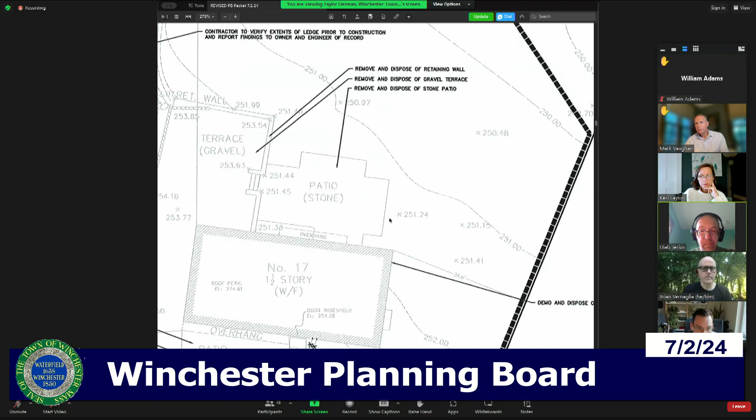So all of the setbacks conform. Yes, I'd still like to see them though. I'm surprised you can't see them on the plan. They're right on there, aren't they? So that's for the existing structure. That's for the existing structure. I thought that's the new structure, and I couldn't find any measurements to tell me anything about what the setbacks were. I thought the table had existing and proposed.

Page 24 of the packet has a diagram of the proposed house, and you can see the setbacks drawn on the map. Page 24 of the packet, at least in my packet. Are they different? Because what Taylor just scrolled by didn't have that column. Wait, maybe right in there. Since we have the petitioners, can we ask them to clarify which page has it? Sure, please. I may have just missed it.

I'm sorry. William here, representing the architects. It is the upper page, on screen now; if you were to zoom in, there would be dimensions from the lot line. And then there are tables on the page left that would give the required. Okay, I missed that. Thank you. Right there, you'll see front setback and you'll see required and then existing and proposed. Okay, thank you. My mistake. You are welcome. No worries.

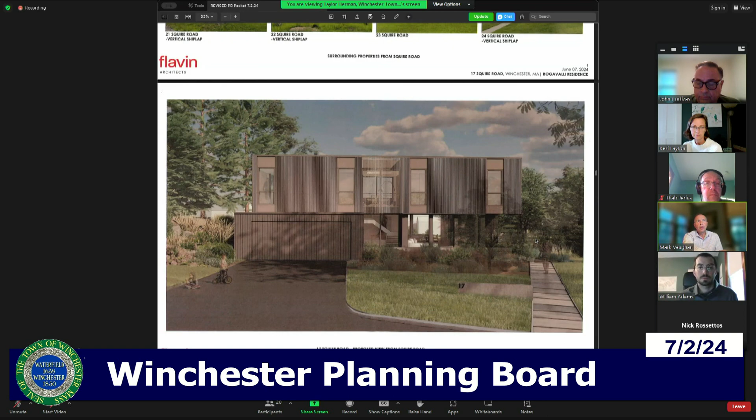And if I could speak to the setbacks, we're basically keeping the setbacks very much consistent with the setbacks of the existing home that is on the lot today. If you look at that table again, the front setback existing is 42 feet. We're at 42 feet, 42.1 versus 42.3. The side setback is 23.5 feet. We're going to be at 21.1, and the rear setback is reduced, but still well in excess of what's required. 20 feet is required. There's 105 feet today, and 69 proposed.

So I don't think by any measure are we looking to build out too much house for the lot. I mean, the lot is 22,000 square feet, well in excess of what the minimum lot area requires. So I think that the house sits very nicely on the lot. My personal viewpoint in terms of its overall size and proportionality.

And I did appreciate that this is not 7,000 square feet, or we're not discussing if we can max it out. I mean, it's a low house also. Right. 25. Yeah, it's well under on height. Short. Yeah, our ceilings are certainly conservative by contemporary standards. 9-foot ceilings. So definitely was an attempt to keep in character and also have a relationship to the outcropping and the neighboring house. The neighboring house on the west is frankly towering over us, being up a good deal of feet. And I agree with Mark, thank you.

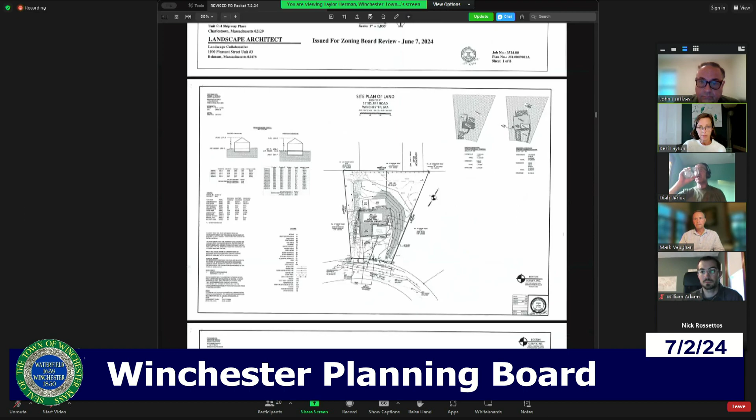Good luck with the project. Thank you all very much. Appreciate your time, thank you very much. Have a happy 4th of July. Thank you, you too. Who seconded that, if you don't mind my asking? John. Okay.

Okay. So on to our second one, which I'm going to confuse with the other one. I know it's Abby Road. Is it 6 or 8? 8, sorry. It's 6. Okay. On to 6 Abby Road. And I think we have a few people here for that one as well. Any comments, questions, clarifications from the board before we welcome comments from the petitioners? Go ahead.

I have some personal knowledge of this because I was on the board when the subdivision was discussed and approved. So one of the concerns at the time was to reduce the impact on the neighbors to the rear of these properties. I forget the name of the road. Dana Street? Avenue, I think. Yeah. And so one of the discussions was to allow the structures to be closer to Abby Road than normally permitted to reduce the impact to the rear. And we all kind of agreed upon that.

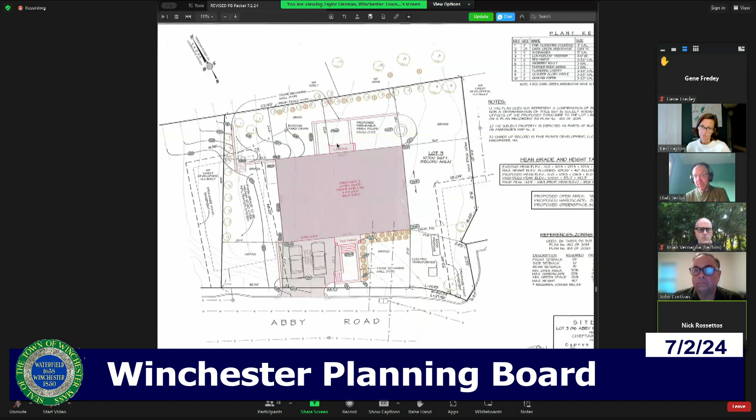If this did not go through, would the house just be built with a 25-foot setback and have it be closer to the rear? My understanding is that would be the case. Just so we're of note, we're not talking about whether the house should be larger or smaller. The house is going to be built, and I guess I want to just be clear on that. If that's the case, if they don't get the variance, they'll build it with the 25-foot setback. It'll be closer to the rear.

The only thing we're doing is allowing them to move the whole structure 5 feet forward so that it creates a larger space in the back of the house. Is that an accurate understanding? That's my understanding, but perhaps we should ask that of the petitioners to make sure.

There's one other comment that we got from a neighbor that I'd like to, well, there are several, and I think she's here, she can raise them herself, but if you could make a comment on, looking back towards when we reviewed the neighboring house, what is the height of this one compared to the neighboring house? Is this one as tall or taller than the neighbor? So are there other issues we want on the table before we hear from the petitioners?

Okay, and Gene, is your hand up because you're representing the project? Or are you a neighbor? Gene, I think you're able. Yeah, can you see me now? Can you hear me? Yes, yep.

Correct. So your first question is about the height. A question about the height compared to the neighbor, because I think 6 and 8 came up for us in one of the big questions. Right. So this is similar in height to the house to the left, which we already built at number 4. And it's actually significantly smaller than the house to the right at number 8. Okay, great. Good. And then any of the other issues you want to take in any order?

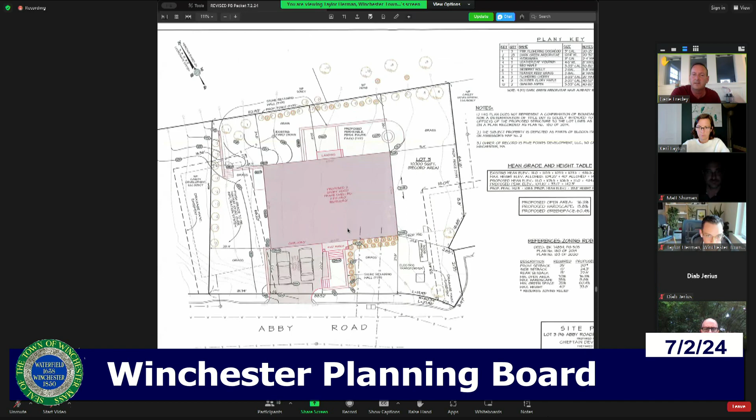Yeah, I can speak to that too. I know that Steve has already made those accommodations. And I will say the two systems that we have here go above and beyond what's required for that house. As was mentioned earlier, the houses were originally intended to be tied in to the drainage in the road. As part of going through the process with the first two lots, we had come up with the solution of putting in two systems and putting 100% of our runoff into our own stormwater management and not use the road systems at all, to increase the capacity of what the road can handle and fully take care of what we were generating from the house itself.

So we've sort of gone above and beyond with that, and that helps with the road systems' capacities because we're not even tying into it. So that's the way that all three of these were built. That's something that was done in going through the process with the first two. I don't believe that's what's done on the fourth one. I think that they do tie in part of the house to the system there, just because I haven't heard that they did a separate one like we've done.

Okay. Okay, and that sort of rolls in flood mitigation. Anyone else have questions on the engineering piece of it? Okay, screening seems well covered. It's natural landscape anyway. Protection and preservation of natural features, I think, having been on Conservation Commission for this one, I'm gonna defer comments on that. But I think you're restoring what you can.

Signage and exterior lighting, I think you noted that you're blocking with a wall, is that right? What specifically? Protection from other houses, I think you're shielded by headlight glare on neighbors. Yeah, we're actually installing a fence along the rear of this property on the right side, and the right side actually helps mitigate with the house on the right of us in terms of their headlights. Okay. Their driveway directly abuts our house, and there was really nothing over there, so we're putting a fence in over there as well. And you're doing both a fence and a green wall, and those are not incompatible? Yes. The fence will allow space for the green wall.

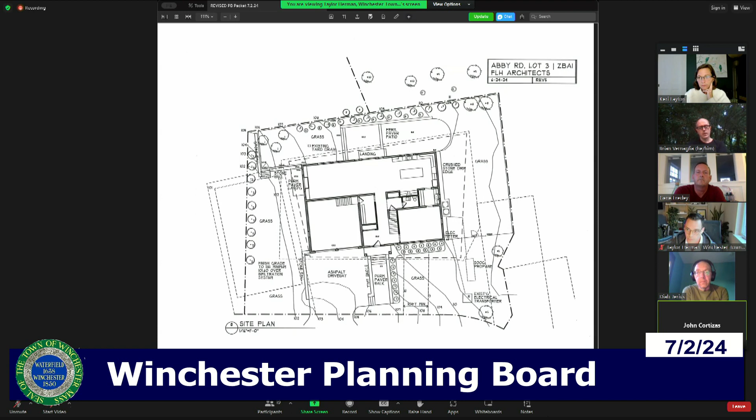Second. Thank you, John. Roll call vote. John, yes. Brian, yeah. Deb, yes. Who did I miss? Nick? Yes. And I am a yes as well, so the variance passes unanimously. And then do we need a motion for the site plan review?

I would move that we take no action on the site plan review because we don't have sufficient information to understand whether cut and fill was minimized on the property. Thank you, Diab. Is there a second for Diab's motion to take no action on the site plan review? Can I, before we go there, Steve is now on here. He might be able to answer more questions regarding that.

We're mid-motion. Alright. I would second that. I mean, I don't think we have to, but then can we have people comment during the board review of the motion, during the discussion, or do we? Well, I just want to point out that we are an advisory board and it's the ZBA which truly needs to know those numbers. Okay. Okay, so we have a second for the motion to take no action on the site plan review. Is there discussion from the board on this topic?

Okay, roll call vote. Brian? I'm gonna abstain. John? Well, excuse me, I missed that. What was the motion? The motion is to take no action on the site plan review. I'm a yes. You're a yes. Nick, yes. Diab, yes, and I'm a yes as well. So the motion passes with 4 yeas and 1 abstention.

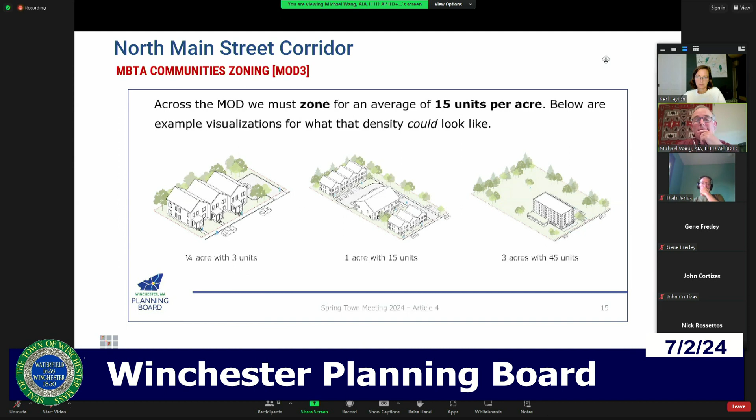So you can see the variations in open space that happen with different size lots and different allowable heights. So in the image on the right, obviously with 3 acres and allowing a 6-story building results in a tremendous amount of open space. And we'll continue to look at the interplay between height, open space, and floor area ratio as we think about where we got to with the draft of the zoning to date.

So again, here we're looking at the underlying zoning component and the desire to incentivize ground floor commercial uses, which is not something that could be mandated in the MBTA overlay. So having certain zoning criteria for the overlay and then doing something different for the underlying is where there's going to be the opportunity to create those incentives to get the type of mixed-use development that would be ideal, I think, along the corridor. Hopefully people will agree.

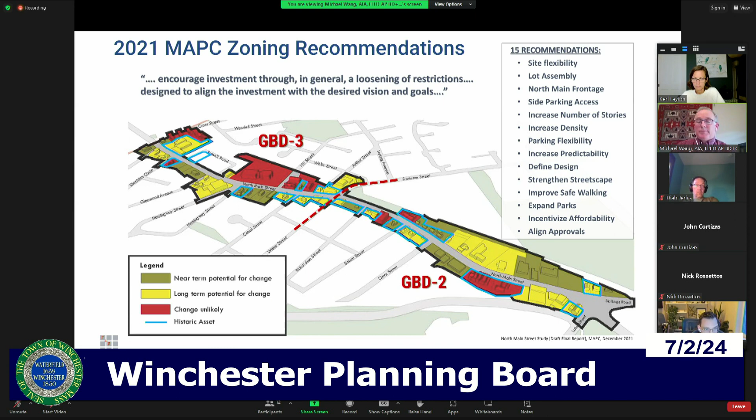Just a couple more sort of introductory things here. This graphic is one that we've looked at before, but it's just to emphasize that when we really got down to it, we did a lot of work at the beginning of this exercise in 2022, looking not only at the parcels, and you'll see a couple of examples of test fits, but we were thinking about the public realm, complete streets, and walkable sidewalks, and all those things as being all part of the equation.

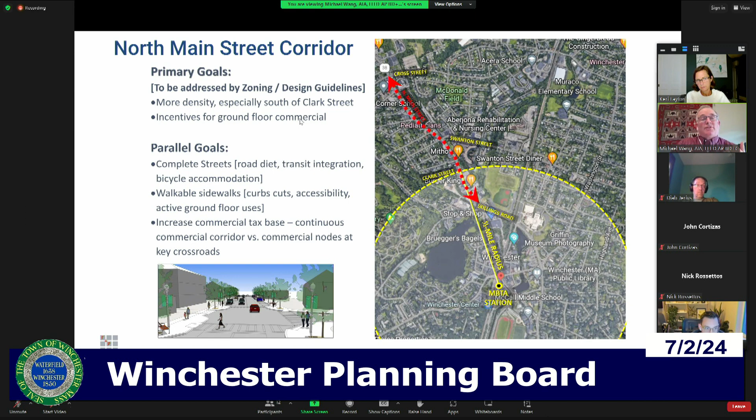When it came to ultimately our zoning and design guidelines exercise, we set aside the complete streets component, obviously because we're dealing with managing the parcels, but the significant goals here the planning board really landed on were more density, especially south of Clark Street, and incentives for ground floor commercial. So those themes will continue to come through as we look at these graphics.

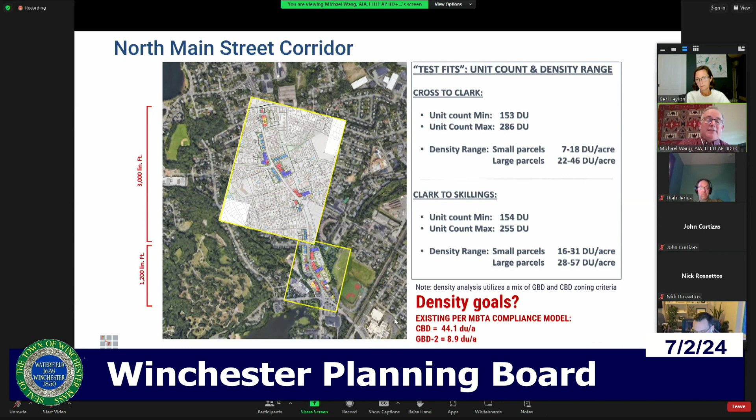So it became really clear that that's kind of a missing opportunity for a much more dense and diverse housing development within the half-mile radius. Well, not all within, but basically the half-mile radius is to Clark, so it's about halfway up there. But so that's how that evolved.

This is an example of a number of test fits that we did on various size sites and what their characteristics were. And I'm just going to do a super high level on one of them, which is parcel 4 here, which is on the east side of North Main, just south of Clark Street.

And what I want to simply point out here is there are certain criteria that were used for the test fit. And essentially, one of them was going to the 0.75 parking spaces per dwelling unit, which is now what was adopted for this area, actually in the MOD3 bylaw. But what I want to point out is with these 2 building footprints that you see here, red is representing street front retail, and blue is housing lobbies and units, and then the upper floors were always housing. But we had 4 variations here on these exact same footprints.

So in other words, if it was a 3-story building that was mixed use, it had some retail on the ground floor and residential above, you were getting 88 units within those 2 footprints combined. And given the site size of 2.5 acres, that was resulting in a density of 34 dwelling units per acre. And it might look something like this rendering on the lower right here. That's a rendering we did for a study down in Hull recently, which is a 3-story mixed-use ground floor commercial and 2 levels. So that gives you an idea of what 34 dwelling units per acre would look like.

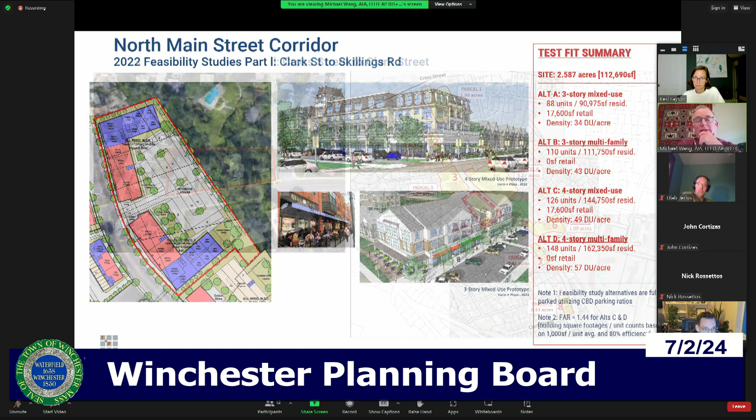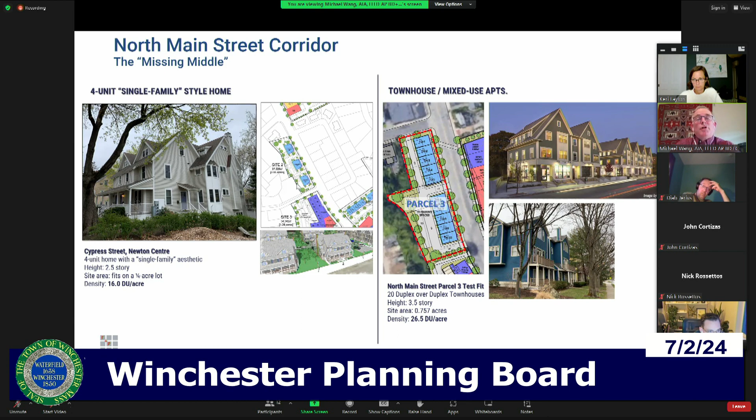And whether or not you have some ground floor retail like this example on the upper right that's from Providence, Rhode Island, or if it's just simply a townhouse like this lower right that's in Newton, you can be getting up into densities at around 25 to 27 dwelling units per acre. So even with these smaller typologies, I think you can effectively get an increase in density.

So then with those test fits behind us and back and forth, we initiated a series of community meetings, and this one was in November, where we presented 5 boards and asked people to comment on them and how they felt about ideas about density.

And you can see here the continuum, again, from that 16 unit Newton example all the way up to, at the bottom right of this left image, an example of the new Trio mixed use development, which is in Newtonville, right next to the commuter rail station there. This is 4 and 5 stories with residential above ground floor retail, and it results in essentially 50 dwelling units per acre. It has a very vibrant streetscape.

So that was sort of the continuum, and we asked people to comment on that, and we also asked them to comment on what they'd like to see on the ground floor, how they felt about architectural and site design issues, which again is stuff that will be controlled in the design guidelines. We asked them about their thoughts on parking and were they comfortable with lower ratios, and with this 5th board, we were asking them whether development should transition in scale and type when you move from the GBD2 farther away from the CBD up to the Woburn line in GBD3.

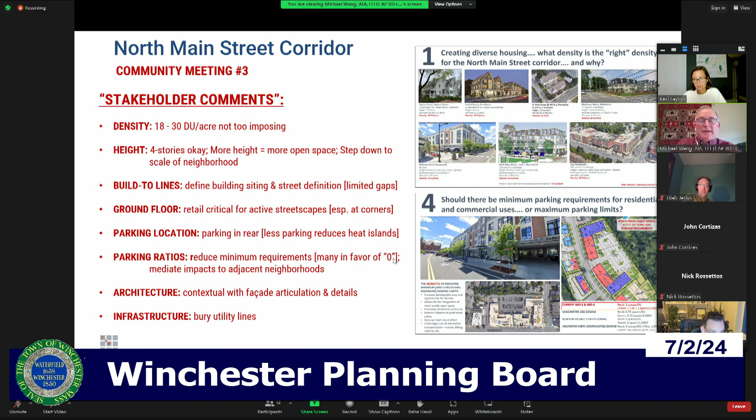And then a lot of the other stuff was based on building siting and getting parking behind the buildings, and what people would like to see for facade articulation. Burying the utility lines is a very popular comment. And parking ratios, surprisingly to me, a number of people were interested in entertaining the idea of going as low as 0, but there were also others that were worried about the impacts of parking on the side streets off of North Main. So I think in the draft that we ended up with in January, we were looking at the 0.75 as a kind of extension of the CBD, at least for the southern part of the corridor.

So now finishing the recap here on where we were, the ZRAC then took that information and took a stab at creating some sub-districts, not unlike what exists in the CBD today. And you can see with the W1 and E1 districts, which are the closest down to the CBD, they were thinking those were good candidates for that higher density mixed use ground floor retail, which is consistent with those test fits that I was showing you of the larger buildings.

The W2, W3, W4, the liner of these western neighborhoods, as you moved farther to the north, there was a sense that maybe lower density was good there. And then there was a little more in-between vibe on these eastern parcels, where they're thinking medium density and perhaps some mixed use. So certainly the corner of Swanton and the gateway location up here in Cross Street, those are areas where the village center overlay districts had been added in recent years. And so there was thought given to having commercial there recently.

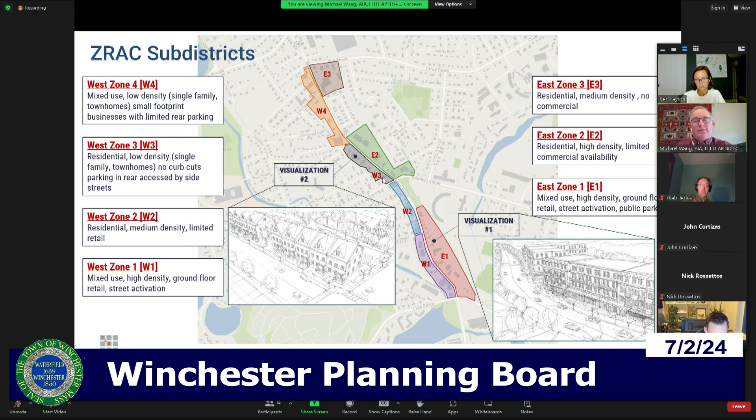So anyway, that's sort of how that played out. We did a couple of visualizations of these 2 sites again, looking at the higher density south of Clark here, and then more that neighborhood townhouse wrapper feel on the W3 site here. So that was building on the test fits again.

And then the next trick was to take those high level feelings about what should be in these sub-districts and to try to assign criteria to them. And so the E1 and W1, you can see here highlighted in purple, and it was felt that if it was just purely a residential type building, that's not what we were really looking for. So we would keep that at the same level that it is today, and also with what the GBD3 has, which is 3 stories and 45 feet.

However, if we could incentivize mixed use, we might allow a 4.5 story building on that site and height up to 65 feet for these sites down here, which don't have the adjacencies to the single family neighborhoods. And they also have the proximity to the station and the core. So I think that was a really good example of how, if mixed use was chosen, you could incentivize that by allowing for much more height and a little bit of a bump in the FAR, which would translate to more density.

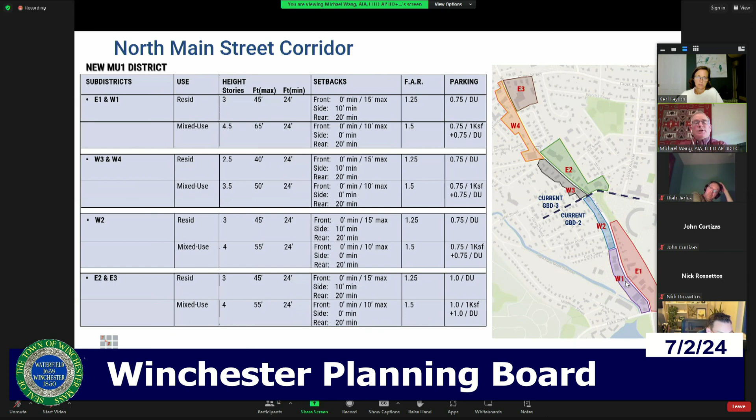And with those, preliminary charts were done for each of these sub-districts. And again, you can see these western, skinnier sites, 2.5 and 3.5 stories, as opposed to the 4.5 that were being proposed down at the bottom here. And this is kind of where we left off. And then the E2, E3 sub-districts were kind of in between those again. These were tweaked a little bit as we did the first draft, and there was some rethinking about whether E1 and W1 should be the same, or should one be more intense than the other.

And then we've done a lot of work on design guidelines here and thinking about things that have to do with how a development parcel contributes to the street and the neighborhood, the corridor, all the important aspects of how buildings are sited, how you access and locate parking, how the building fronts on the primary street frontage, and then the details about overall architectural character, facade design, etc.

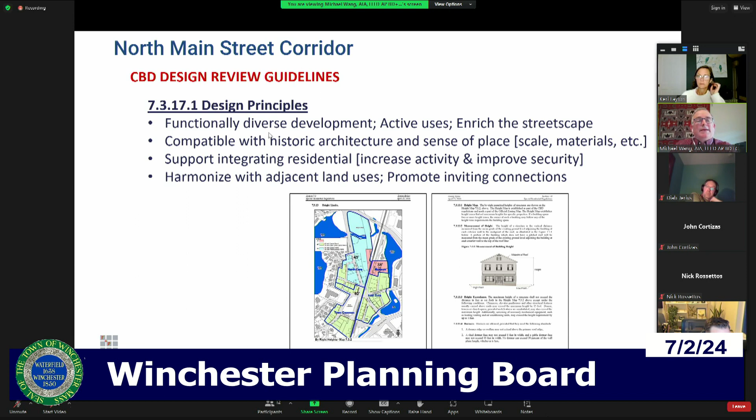I'm not going to spend any time on this, but just to say that obviously the CBD is a nice, concise document that has all the characteristics of it and outlines principles. It talks about open space and circulation, what's the appropriate mix of land uses, and then it gets into the meat of it here with the design guidelines, elements of form, and other details related to architectural qualities.

We had some of these at I believe the last ZRAC meeting. We started to produce some graphics, and these are examples of 4 graphics that talk about buildings. And these are a couple of examples of mid-block sites versus a corner site. See, there's a secondary street in this upper right one. And so we talked about how you access these sites and where parking should be provided.

You can have it as long as it's behind the front facade and not in the build to zone, which is along the primary street here, and having through connections on the backs of sites and things like that were favorable. And then the point being on this upper right one that if you have access off of a secondary street, that's a preferable way to access parking and to maintain the continuity of the streetscapes on the primary street, and for walkability and safety was clearly preferable. So if you had access on both, it would then not be allowed on the primary street.

So anyway, these are all kinds of things that can be graphically integrated to illustrate the design guidelines. And I hope that we can continue to push these forward. And not only with site design, but this can be done with architectural design.

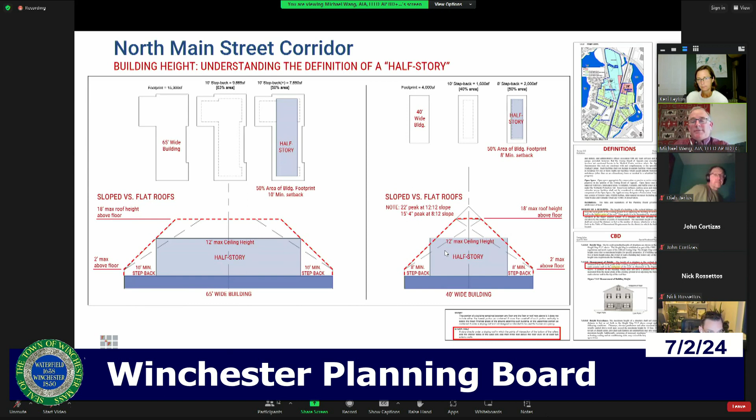And this is an idea about half stories, which your bylaw sort of assumes is a sloped half story. But a lot of communities are defining half stories as also possibly a full height story, but stepped back at the top floor. So that impacts how you define what's an appropriate height relative to the number of stories and that kind of thing. So anyway, I think all these graphics can be super helpful, both for site design and architectural design.

So for example, as you increase the FAR, you're increasing the opportunities for density here. And those things are all interrelated. And I think we've double checked our assumptions in our first draft, and it all seemed to make sense at the time. So I'm going to stop there with this last slide,

which is a graphic representation of July 1st, yesterday, through essentially September 23rd, when the warrant article would be due, about 45 days before town meeting. These are dates that Taylor has given me, and we used them to build the proposal. You can see here the series of meetings, starting with this one on the upper left that we're doing right now, and another meeting for the planning board, which would be essentially when they would have to vote on the warrant article. And that follows a town council review.

There are 2 public hearings here that you see in red that would be arranged in mid-July and early September. And then there are a series of ZRAC meetings, some stakeholder meetings that can be done virtually or in person. There's a select board meeting that happens at some point here, and these other planning board meetings are just assumed updates along the way, and we've got 2 a month in there over a 3-month period.

And while all that community outreach and discussion is happening, down below here, we're working on refining these zoning criteria and the design guidelines and generating the text, and hopefully leaving ourselves a couple of weeks to consolidate that all into a final draft, so it can be reviewed by council, and then you have your vote, and that's all done by September 23rd in theory. So that shows you how many meetings there are in a short period of time. That's all I've got, Keri, I think.

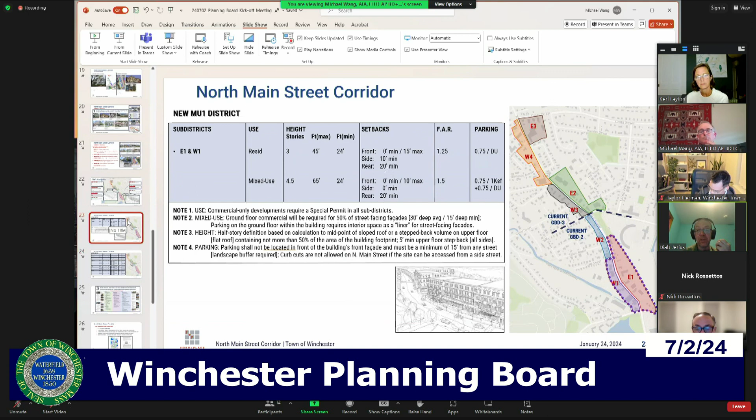So just to go back to, I think, Keri, your very practical suggestion: we start off looking at the individual sub-districts. We are looking at the dimensions, the FAR, how much open space we want. And so we come up with a general framework for that. Then we start looking at uses, and we leave some flexibility in our dimensions in case we think that maybe a use is better in one place or another, and we have to tweak them to allow it.

And then I don't want to lose the complete streets aspect. And I know, Michael, you kind of skipped, we got one little picture on the first slide of that. And I know we spent quite a bit of time trying to think about how we wanted the look and feel of this corridor to really tie it in. And we talked a lot about what setbacks do to that streetscape and how you step buildings back and all of that. And so I don't want to lose that. I guess that comes down to the design guidelines, but it must also reflect something in the dimensions.

Yes, and I think the idea of the build-to zones and getting a certain amount of required frontage definition, which will go hand in hand with forcing the parking to be on the side or rear. And then, again, emphasizing the mixed use aspect of that. I think all those things are components that will be in the design guidelines. And things like we could do a required percentage of frontage build-out, for example, as a criteria, as opposed to really a design guideline thing. So there are lots of potential secondary variables there beyond the big ones we always start with.

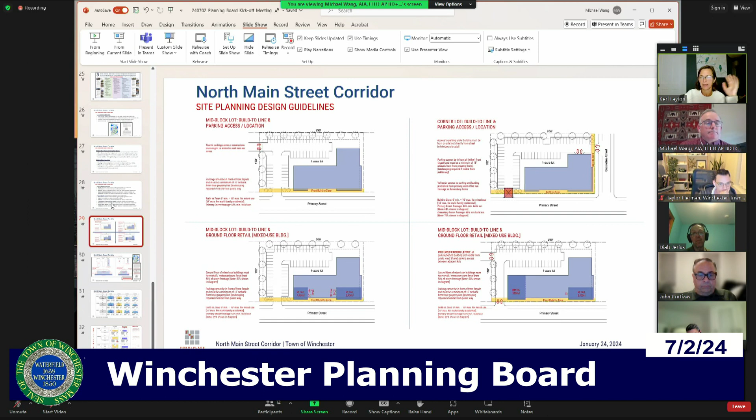Okay, do we have a sub-district that makes sense to start with? I imagine they'll get easier as we go because we'll hammer everything out and get our head around how they work. So what seems like the best one to start in? Yes, I vote for E1 and W1. I think that's a smart place to start. We've got a good lead in from the CBD guidelines. They're definitely an opportunity area, and they will bring together a lot of topics. So I think that's a great start. Any dissenters? Anyone in support? Thumbs up. Okay, great.

So you have yellow stars on your timeline chart. Are you planning to attend all of the planning board meetings? Because that could be more of us than you can handle. I don't know, that's up to you. Well, I think I've accounted for two meetings a month with you guys in my proposal, and I think it'd be a great opportunity to get your feedback if we can organize it ahead of time and then get at it. That would be great.

Okay, so Taylor, this is a casual suggestion that's kind of a major pain in the keister, because now we have to take all of our guidelines and create them in sub-districts. So Taylor, how complicated is it to create a shared document where we're editing focused on E1 and W1? I don't know. Let me give it a shot.

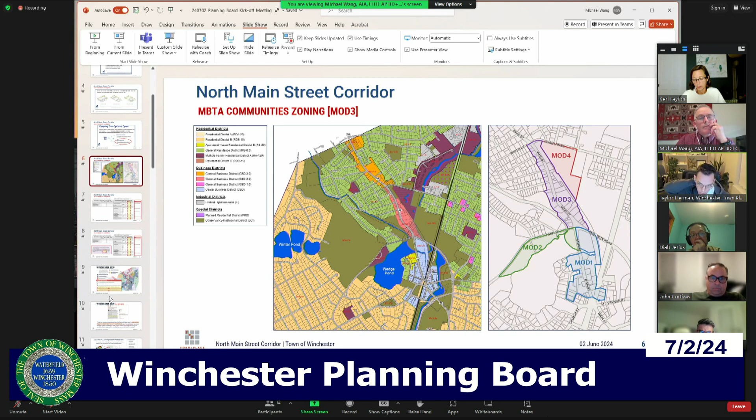So Stop and Shop is staying? We don't know that. We still don't know. So in this conversation, we need to decide, or at some point, it doesn't really matter, do we create its own sub-district for Stop and Shop? Or do we put it on E1? The map that you have up there, Michael, is actually incorrect.

Stop and Shop, the two Stop and Shop parcels, are not actually a part of the central business district. They're part of the general business district 1. So they are different from any of the other GBD ones, except for maybe Bunnell Ford. I will admit that I didn't know this, because this is our CBD, Michael has our CBD map up and it's part of this. So in our CBD documents, our CBD rules and regulations and our CBD bylaws, it's included, but it's actually GBD 1.

Okay. So doesn't the CBD zoning supersede the previous zoning? But in the state approved zoning, it is GBD 1. I see what you're saying, and maybe it's worth you taking that up with Janine, because Janine seems to be the authority on this. Okay, Janine, because she knows the zoning. Yeah, she does know the zoning.

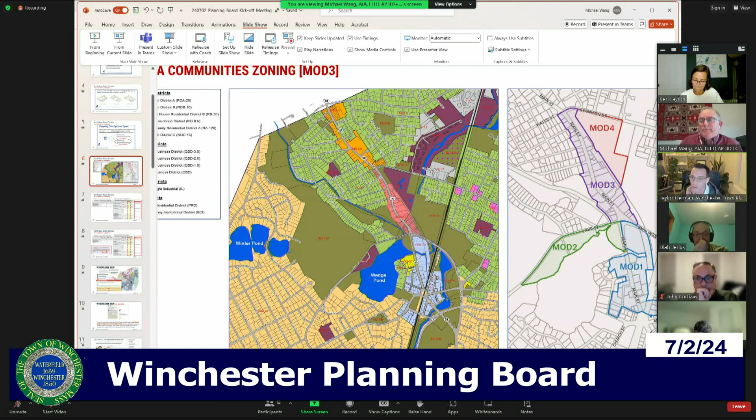I just think that if the CBD zoning came about after GBD 1 and it included that parcel, then it should, I mean, the official zoning map is what, okay, so this is something we'll have to review. I wanted to bring it up because we're in this conversation now, but it shouldn't derail us from the rest of the conversation. We should keep that in the back of our minds. We'll pursue it simultaneously.

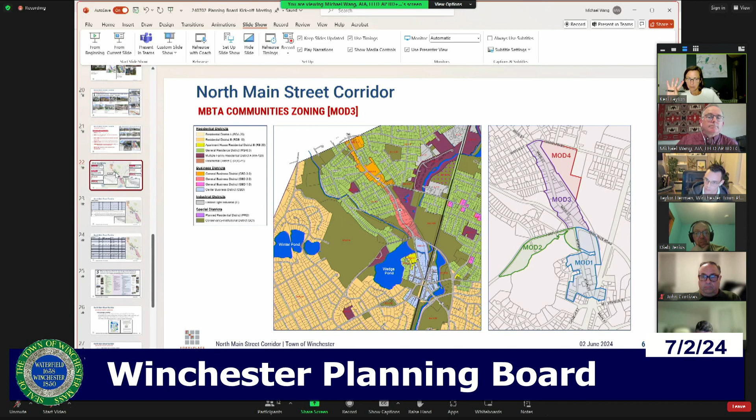And it's possible. I mean, it's such a great opportunity spot. It's possible that it works to our advantage that it's in its own little zoning island. So we should definitely add that to our discussion at the next meeting. And meanwhile, I think if we discuss E1 and W1 and get our heads around that, it may naturally follow whether Stop and Shop is something we want to have different goals for, or whether it makes sense to roll it in and it suits those goals.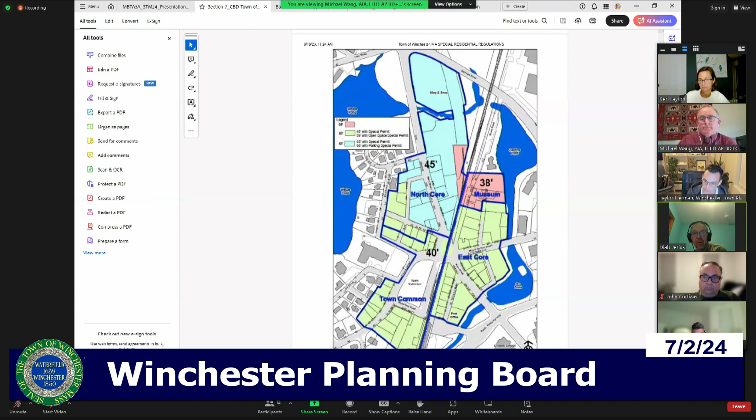We may want it taller. We may want it streamlined for affordable housing. We may want the movie theater everyone talks about, the rink we've all missed. I have all kinds of ideas. I wonder, is it actually part of the PUD there? I think it is. If it's part of the PUD, then it already falls under one of these more intensively. Right. So offline, I'll go and work with Taylor and Janine and figure out the legalities on this one.

Certainly it's the ultimate gateway site there. Right. It could be more. It could be Stop and Shop plus more. Okay, so our goals are E1 and W1, some editing of a shared document by our next meeting, and then a more in-depth discussion about where we are, what questions we have, and what we need to move forward with that sub-district. And the next meeting is the 16th of July.

What's the meeting after the July 16th meeting? That'll be August 6th. Oh, okay. So we have a week off in the middle of the summer. Not really. We have a joint meeting with the select board on the 29th. Sorry, I forgot that one. That's a Monday. And that's in person because they meet in person, right? What time is that? 6 p.m.

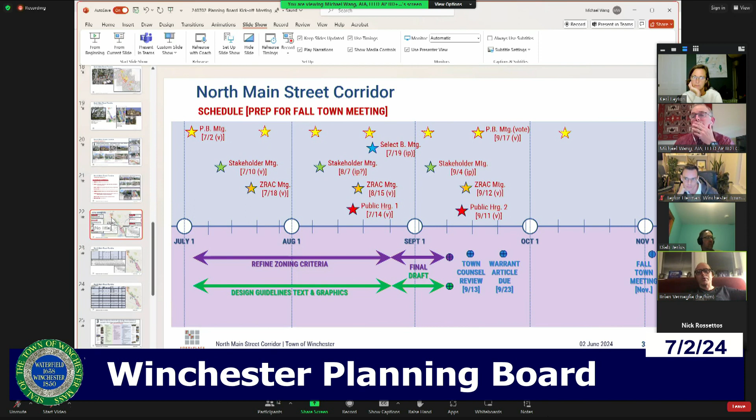Okay, other things, go ahead. So instead of pulling out, I think Carrie, you were saying we should pull out East 1 and West 1 into its own document or something. I feel like we could just have whatever documents we have existing right now, but just say, don't only focus on East 1 and West 1 so that we don't have to pull stuff out, edit it, and then add it back into a whole document.

We could just be working on the one. Yeah, we're gonna zone by sub-district though. Yeah. So we don't want to then edit it as zone 2, then edit it as zone 3. So that's why I was asking Taylor, is it easier to do a chapter in what we have now, just a different heading? Do we create a fresh doc? What's the easiest way to not muck up our draft?

Okay, yeah, I just was thinking that we could have the draft material for West 2, 3, 4, East 2 and 3 in the same document and just say, don't look at that now. Look at East 1 and West 1. I just don't want Taylor to have to make work separating it now and then pulling it back together later. But whatever's easiest for him, I agree. Yeah, I was sort of trusting that he will produce something and have us just access it, but good point. We don't want to reinvent the wheel every time we move sub-districts. As long as it's always round.

Yep. And then as a reminder, we do have that media bank. So if you're trying to remember what the boundaries or what's existing there now, those are probably the least slick because West 1 winds around a couple of blocks, I think. But we have them if you need to reference what's there. And we didn't have this image in there. Remember, we were looking for this, so this is good. Hopefully maybe it is in there now. We had the lost sub-districts. Yep, with the sub-district, so it's good to have this. I actually screenshotted this, but hopefully it's also in there too now.